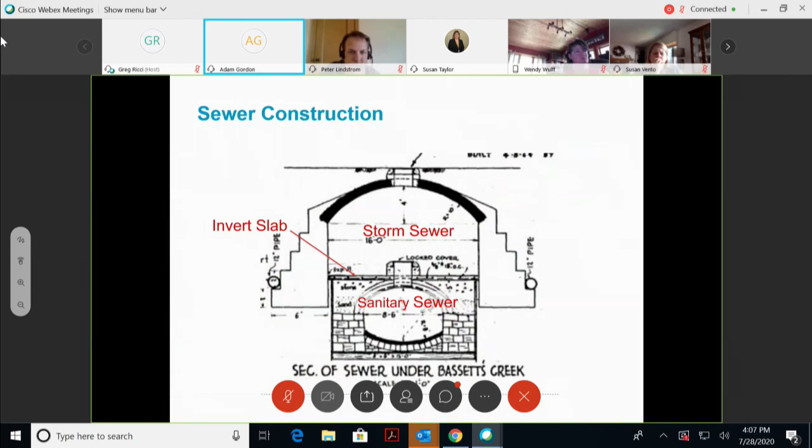And if you're suffering a little case of deja vu, this area should be familiar because it was one of my first business items last year for emergency repair that we did just 3 blocks south of this current location. And if you go to the next slide, the interceptor at this location is constructed a little bit differently than the location where we had the repair last fall. The sanitary sewer is constructed underneath a storm sewer. The sanitary interceptor is very old. It's constructed in 1889. It's one of our oldest pipes. And the access to our sanitary sewer is actually through the storm tunnel, known as the Bassett's Creek Overflow. So it's the original tunnel in which Bassett Creek was put into back in the earlier part of the century.

And if you go to the next slide, on July 17th, just a short while ago, the city was cleaning the storm sewer when they found the concrete slab floor of the storm sewer had been cracked and it pitched into the sand bed that lies between the storm tunnel and the sanitary interceptor. And there was a strong suspicion immediately that this might have breached into the sanitary sewer below. You can see that there's quite a bit of floor that had broken away, and at the side of the wall it looks like things are missing, and the sand has been lost from beneath that floor of the storm sewer. Next slide.

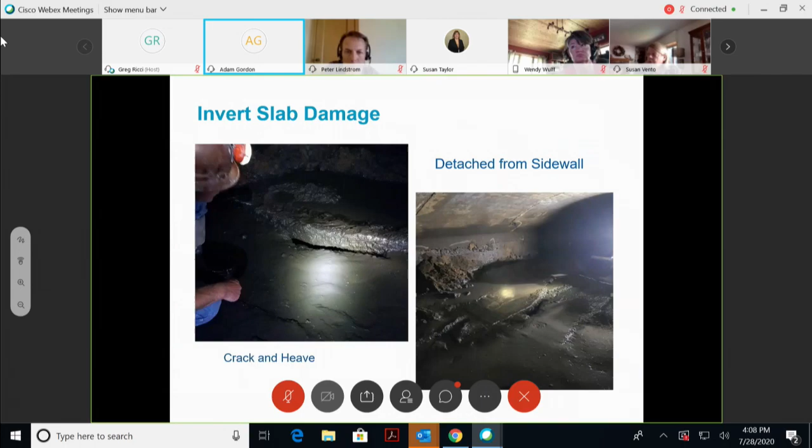So we mobilized to the site with our televising crews and found that there was no breach into the pipe, and that things looked actually pretty good. It's really important to remember that we had a cleaning project in this area last fall, so we had video recording of the condition of the sewer along this stretch, and we didn't find any differences between the condition of last fall and the current condition. So things looked the same, and there was no breach and no collapse in the sewer. So we all sighed a heavy, deep breath. Next slide.

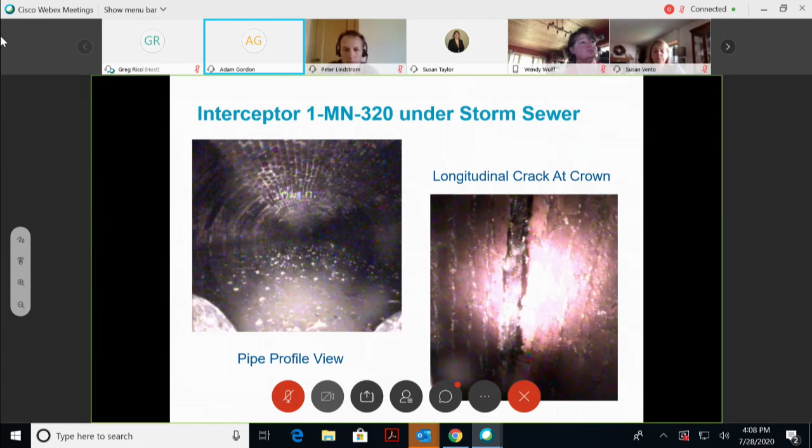But at the onset of the discovery of the damage to the storm sewer, there was a lot of concern, and we developed an emergency declaration to make sure we had engineering services at hand and that we're prepared to remove broken concrete and any debris, repair the tunnel, replace the sand bed with some lightweight fill, replace the slab, and cover our project communications. We're looking at about $250,000. And part of this is the access to the sanitary sewer, which would have been difficult to mobilize into. Fortunately, it's already open because of the existing cleaning project the city has going on right now. They have a contractor who's closed off a street and has the storm tunnel open.

But we're looking at about $250,000 to pick up our share of the cost with anything that we found to be defective. To date, just to update you, we've worked very closely with the city daily on their investigation. They're actually performing a lot of the work to remove the concrete slab from the storm sewer, to investigate the sand bed over the top of the interceptor.

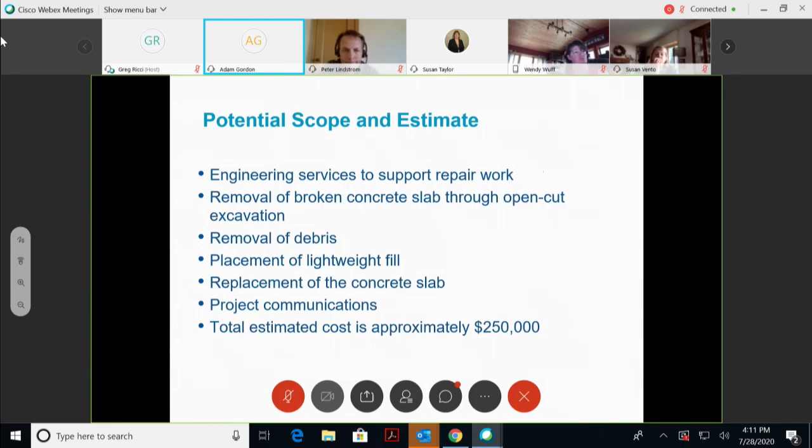I also wanted to bring up that since our last fall emergency declaration on a different location of this interceptor, we've been in regular meetings with the city about how we're going to eventually decommission the 1889 sewer. There's a lot of problems with that sewer foundation-wise, with the piling that's failed underneath the pipe. We have heavy sedimentation of that pipe.

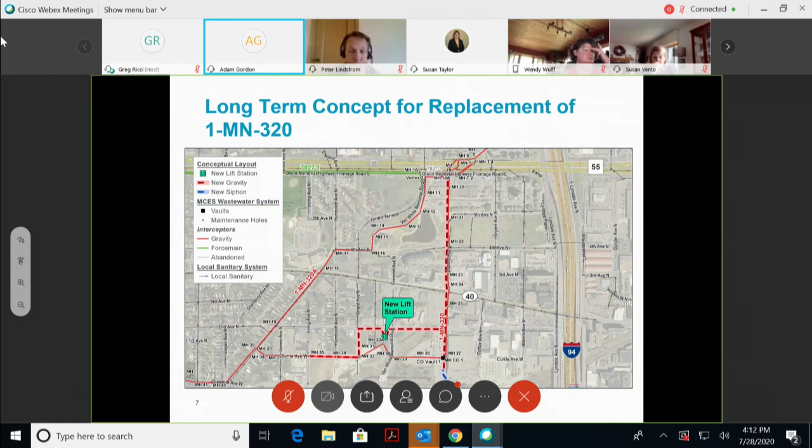So there is a concept out there for actually building new pipe in this area to relieve and allow us to decommission the old pipe. So there is a replacement plan that we're working on, and we've been meeting with the planning department to discuss locations of a potential lift station and working with the engineering department to look at their connections and just what that new routed pipe would look like. And we go to the next slide.

So the proposed action for tonight is that the Metropolitan Council ratify the justification for the declaration of emergency repair of Interceptor 1MN320 at Van White Memorial Boulevard and 5th Avenue in Minneapolis, attached to the business item. And at this point, go next slide, Mr. Chair and committee members, I'd be pleased to take any questions.

Thank you. Any questions for Mr. Gordon? Well, Mr. Chair, I have one for Mr. Gordon, if I may. Please. So, when I look at the workmanship and I could get 131 years out of a pipe, I think that's pretty extraordinary. What is our current workmanship? What kind of life do we get out of our current, most modern pipes that we're dealing with right now?

Yeah, and I think last year I actually alluded to, you can date an engineer by the type of pipe they put in the ground. And our evolution of materials has always been constantly changing. I am always amazed, as you've seen from those photos, and I've seen photos that were taken from the 1880s of the construction of the pipe in black and white, of course.

And they were hand moving earth or using animals, ox, whatever they had, and steam shovels. And there were a lot of workers that were not wearing hard hats because they didn't have them back then. And they were carefully mortaring together this pipe. And it is remarkable that it has performed as well as it has all this time. And that is a testament to basically the brick and mortar.

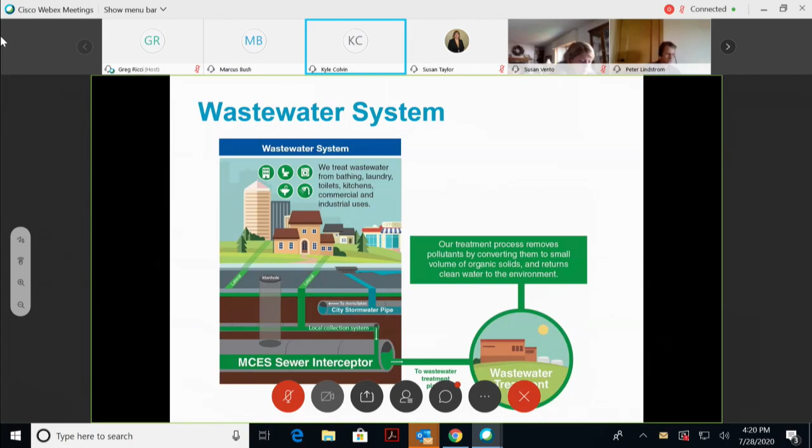To keep our wastewater system working well, the residents, communities, and the region have been reducing I&I from entering those systems for decades. I think everyone on the committee knows what I&I is. However, for those listening in, I&I occurs in every wastewater system in varying degrees. It's short for inflow and infiltration, which are the methods that groundwater and stormwater enter the wastewater collection system. As a result, it is mixed with the wastewater and treated at one of our wastewater treatment plants.

Reducing I&I entering the system costs less than trying to convey and treat that clear water after it enters the system. There are many ways stormwater and groundwater can enter the wastewater system, and it takes a combined effort from all involved to mitigate those sources. Next slide.

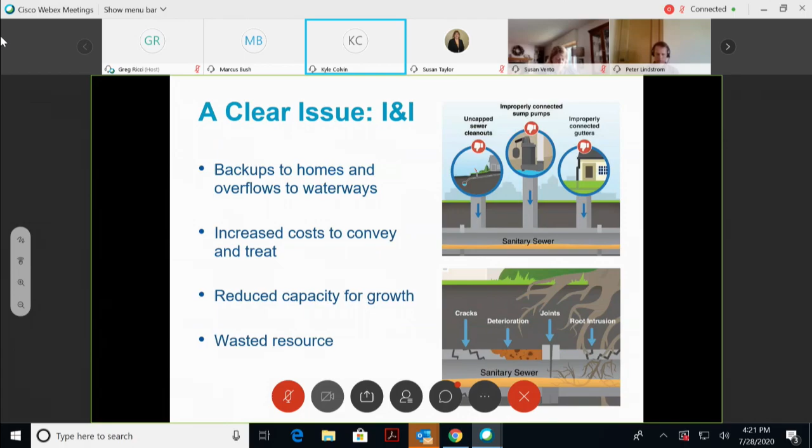From the late 1800s to the construction of the Metro treatment plant in 1938, and through the sewer separation projects in the 60s and 70s, and the regional I&I mitigation program effort since 2007, we are now at a point where it's been 10 years since there has been an overflow from the regional system to the river. This demonstrates that local and regional investments to separate the systems and reduce I&I are showing progress. Next slide.

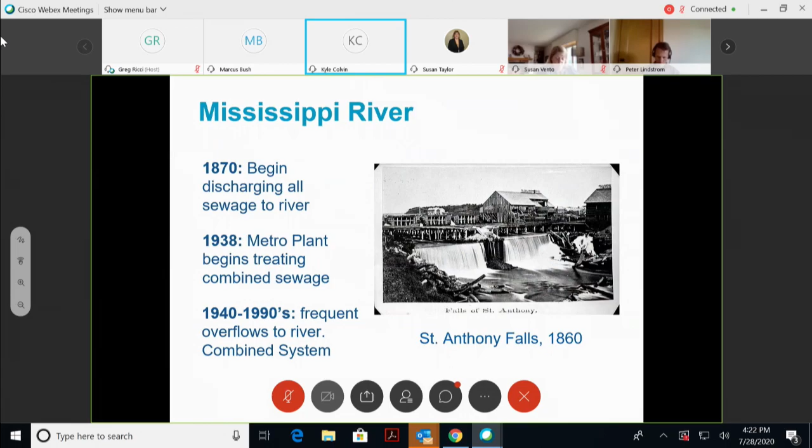Today, our wastewater and stormwater systems are conveyed in separate systems and treated in different ways. Wastewater is treated at wastewater treatment facilities, and stormwater is treated according to best management practices and is available for infiltration back into the ground or reuse where appropriate, or return back into the environment. However, this is not the way the original system was built nor operated.

The initial construction of combined sewers began in the 1870s. Both stormwater and untreated wastewater was conveyed to and discharged to the river through a single system. In 1922, construction started on the first separation of storm sewers around the lakes and in newly developing areas of Minneapolis and St. Paul. In 1934, construction of the Metropolitan treatment plant began in St. Paul and began treating stormwater and wastewater combined system in 1938.

In the 1960s, sewer separation started in Minneapolis and St. Paul in connection with infrastructure improvement projects. It is estimated that the two communities spent over $330 million in funds to build separate sewers. These projects were funded in part by state and federal funds. Ultimately, the city of Minneapolis alone diverted 4,600 acres of stormwater watersheds away from the wastewater collection system.

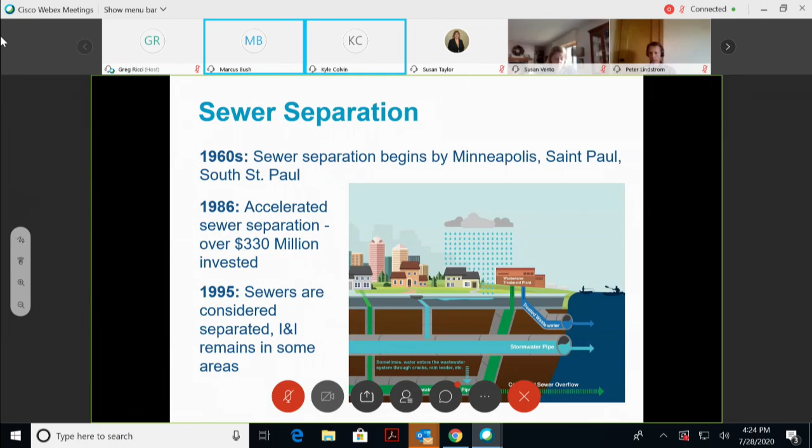The catalyst for today's regional I&I program was the July 1987 superstorm, where 16 inches of rain fell within a 1-week period. Excessive I&I in the Blue Lake Service District caused a failure in the river crossing pipe between Eden Prairie and Shakopee, resulting in untreated sewage to be discharged into the Minnesota River for over 2 weeks. The Metropolitan Waste Control Commission negotiated with the EPA and committed to a regional I&I study. This resulted in the EPA not issuing a consent decree.

Kyle, I'm sorry. This is Susan, to interrupt you. We've got some background noise from somebody. Can we have you go on mute, please? Thank you.

Thank you. In 1990, the Metropolitan Waste Control Commission completed a system evaluation which estimated that 20% of the regional annual wastewater flow was from I&I. The final report identified 2 approaches to reduce excess I&I in the system, one being an incentive program whereby communities would be given financial incentives to pursue I&I mitigation, and the second being a disincentive program reflecting financial penalties such as surcharges. The commission elected to implement an incentive program consisting of grants and loans.

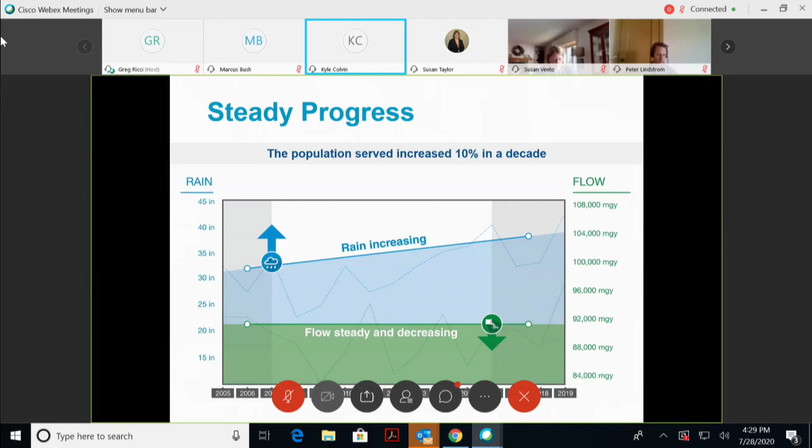From a climate perspective, 2019 was the wettest year on record. Prior to adding the 2019 data to this chart, the regional flow trend was shown to be going down much more significantly than it does here. Total regional flow in 2019 was the highest since 2004. This demonstrates that wet weather still has a direct impact on regional flow and demonstrates the need for continued I&I work. However, it also shows that progress can be shown from the work that has been completed to date by the local communities. Next slide.

As I mentioned earlier, there have been 2 major storms since the beginning of the I&I program that are very useful in understanding the effectiveness of I&I mitigation. The October 2005 storm event, which in essence created the first assignment of community work plans, with the 55 community work plans being assigned, as I mentioned earlier, and the June 2014 storm event, which was preceded by a wetter period and was a larger storm in magnitude and in duration than the October 2005 storm. And yet wastewater flows at the 2 largest regional wastewater plants, at the Metro plant and at the Blue Lake plant, were lower in response to the 2014 storm event than they were in the 2005 storm event.

And it is also important to stress that last year, again, was a record amount of rainfall recorded in the Twin City area since the start of data collection. Earlier today, I was talking to a watershed manager who indicated that their data characterized the last 10 years being the wettest 10 years on record, the last 5 years being the wettest 5 years on record, and 2019 being the wettest year on record. So I think this clearly shows that as climate change progresses, the system will be taxed more and more often.

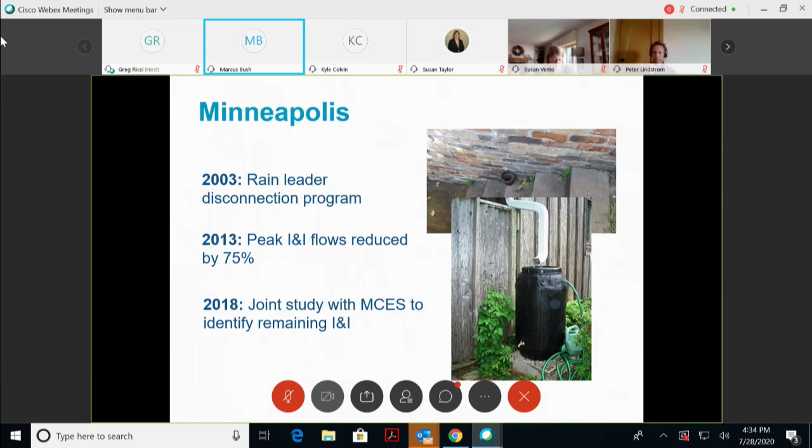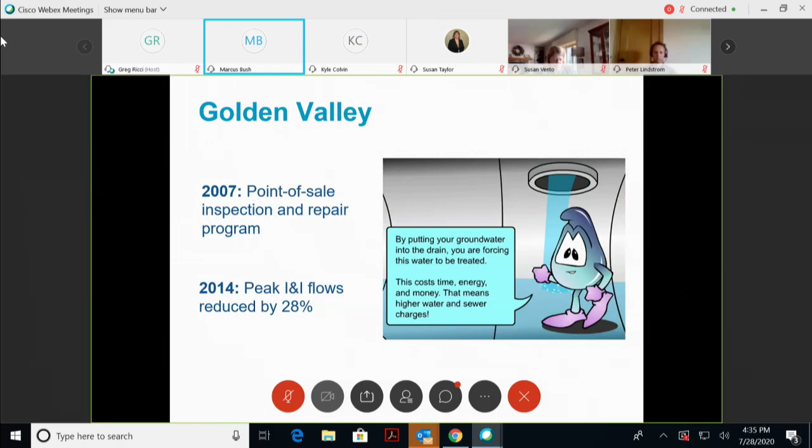The City of Golden Valley began a point of sale program in 2007 in response to the I&I program. Many aging service lines from the home to the city sewer have been inspected and repaired or replaced at the time of sale. Doing so reduced the peak inflow and I&I flows by 28% and helped to regain capacity needed for growth. Without reducing I&I, they may have had to add more capacity with larger sewers in order to grow and spend much more money than reducing I&I from the existing system.

Next slide, please. And the city of West St. Paul began an inspection repair program in 2008, also in response to the I&I program by the Met Council. Through 2013, there was a 33% decrease in peak I&I flows. That decrease was realized during the time that the parcels shown in green were inspected or repaired. There has been so much more work since then, shown in the orange, that even more reductions are expected. We're intending to run these models again this year to quantify those reductions, and I'm working on the project management of that now. Those inspections and repairs in green were aided by about $560,000 in grants administered through MCES.

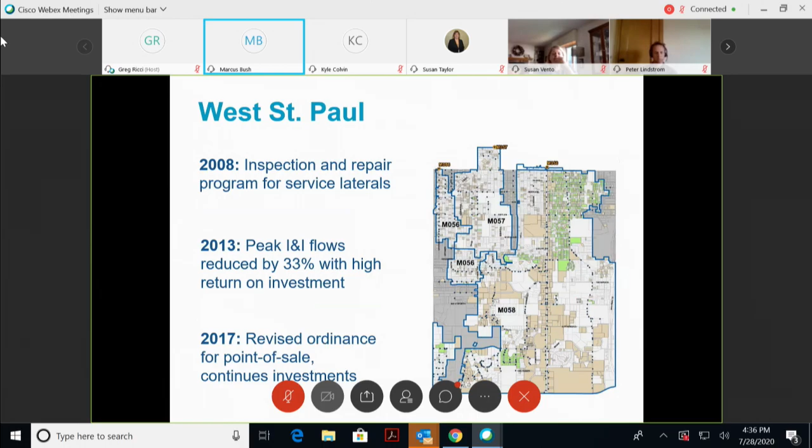All three of these communities access grant funding as it was available to support these local projects and have increased the resiliency of the regional system by reducing excessive flows. Next slide, please.

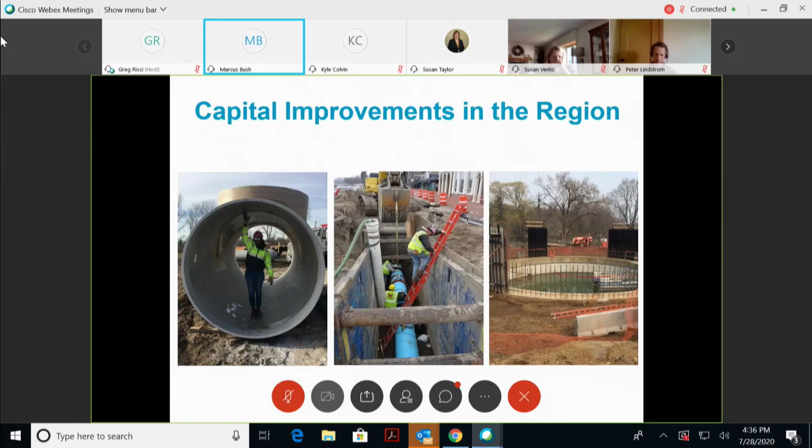We've just shared how our customer communities are going about addressing I&I from private property, but as mentioned earlier, the council's interceptors need investment as well. In the past 10 years, about $1 billion has been invested in asset renewal in our wastewater infrastructure. About one half of this investment has been in the conveyance system to get the flow from the cities to our treatment plants. Many of these projects include work that prevents clear water from entering the system by installing cured in place pipe, replacing pipe, or rehabilitating manhole structures. Next slide, please.

As we were talking before, there are definitely some rainy days ahead. The I&I program and work by communities has been incredibly successful at reducing the chance of overflows. Even with the new climate, flows are continuing to decrease. However, with increased intensity and frequency of rainfalls, we need to continue the work to keep the clear water out of the wastewater system. Next slide, please.

As Kyle mentioned earlier, in 2016, there was a third task force on I&I, recognizing the need to continue progress with the I&I mitigation. We did convene that task force in 2016 to get some recommendations for moving forward. The task force was represented by communities across the region with experience in public works, finance, and administration.

In all, the task force recommended that the council work with metro cities to advocate for public infrastructure grant funds on behalf of communities, the council develop a public outreach program that can be utilized by communities, develop a model ordinance and best practices for private property service lateral inspections that could be utilized by the communities, and hold workshops for communities and their consultants on the MCES I&I program, progress of mitigation, and requirements specific to I&I for the comprehensive plan updates. Next slide, please.

And it's very easy to understress. We can't stress enough that the task force is really looking for assistance with private service laterals, the pipe that goes from the house to the city main in the street, and that those laterals and leaks from them represent an unquantified and unaddressed share of the total I&I in the system. It's estimated that up to 80% of I&I comes from these sources on private property, and yet less than 15% of investments regionally have been focused on those sources.

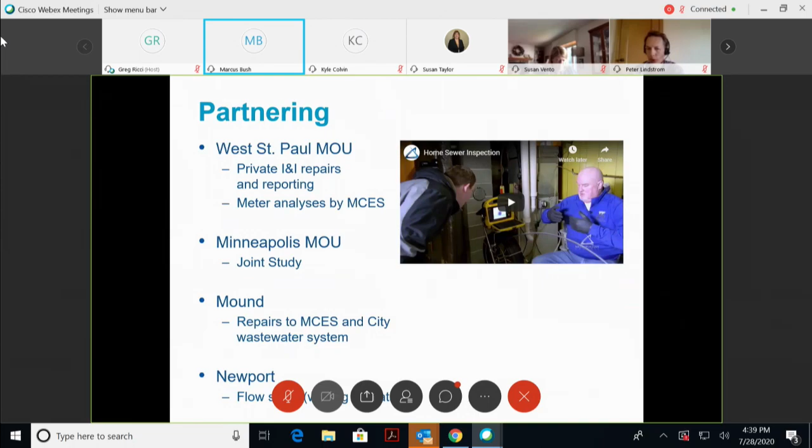And Newport, we're also doing a flow study with that community. We are waiting on some flow data in order to complete that. Next slide, please.

Engagement's pretty key, and not every community will have the same approach, but having the right tools is key to building an effective I&I mitigation program. So we provided those tools. We have videos, newsletters, graphics, messaging, and more can be found on our website. It's free and anyone can download it. A collaborative effort between the council staff and the cities.

Last year, we launched an updated website with the aim to assist the public education. The toolbox includes the videos, graphics, newsletters, handouts, photo galleries, most anything the cities could need to have that communication with their residents. And I think I'll pass it back to Kyle to talk about the comprehensive plans. Thank you, Marcus. Next slide.

As Marcus indicated, one of the recommendations that came out of the 2016 I&I task force was a requirement for communities to include in their comprehensive plans more detailed information related to their local efforts and commitment for continued I&I reduction. This included approaches for addressing private property sources through financial incentives and characterization of the susceptibility of I&I in both the public and private collection systems.

Some of the approaches for addressing private property sources within these plans include grants and loans. Sometimes communities will provide financial assistance for private property work. However, many times the cost of those grants are assessed to the private property owners over a period of time.